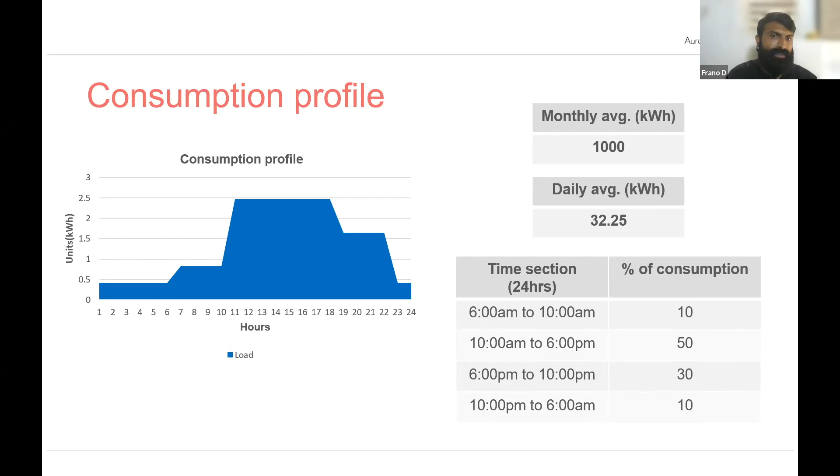As you can see, at 6 o'clock in the morning there may be a slow start. It might be the beginning of the first shift, peaking between 10 and 6 p.m., signifying maximum production at that time. Then the consumption gets lowered during the night hours, with a drop to the base load of the industrial sector in the early morning hours. So taking this as an approximate representation of the industrial consumer, we then try to recreate this in the Solsavi web tool that we have developed.

And how do we try to do that? As you can see in the graph, on the x-axis we have the hours in the day, while on the y-axis we have the units consumed in kilowatt hours per hour. We take these 24 hours and divide them into 4 time sections as represented in the table on the slide, and we allocate a certain percentage of electricity consumption to those time sections to create this consumption profile in the Solsavi web tool.

Now that we have realized that this is the way that we could recreate our electricity consumption profile using the web tool, we would also like to know how this consumption profile would change when a solar system has been introduced in the location.

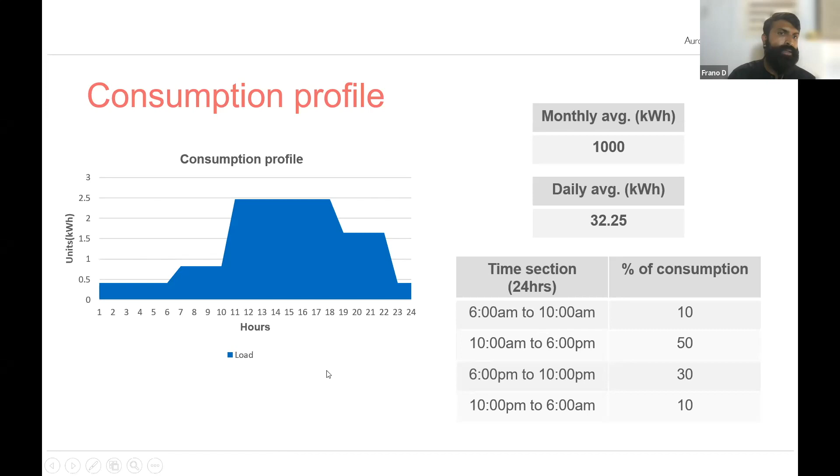So we would imagine that a certain portion of the load is taken by the solar system that has been installed. And moving further, we could see a representation in this graph where we have installed a solar system that contributes to 30% of the load or 30% of the consumption in the day, and the grid provides 70% of

the consumption. As indicated in the graph, the blue portion is the electricity that has been supplied by the grid, while the green portion would be indicative of the energy that has been supplied by the solar system installed to satisfy your load or your consumption requirement at that particular time during solar hours.

And if you notice the orange hashed portion, this indicates the amount of export that is possible with your consumption profile for the installed solar system at your location. Please also note that the red line that forms a curve starting at around 7 a.m. and ending at around 5 p.m.

in the evening indicates the maximum solar generation from the installed solar capacity in the location, and the area under that curve falls under solar hours and could represent the maximum solar generation from the installed capacity during those hours.

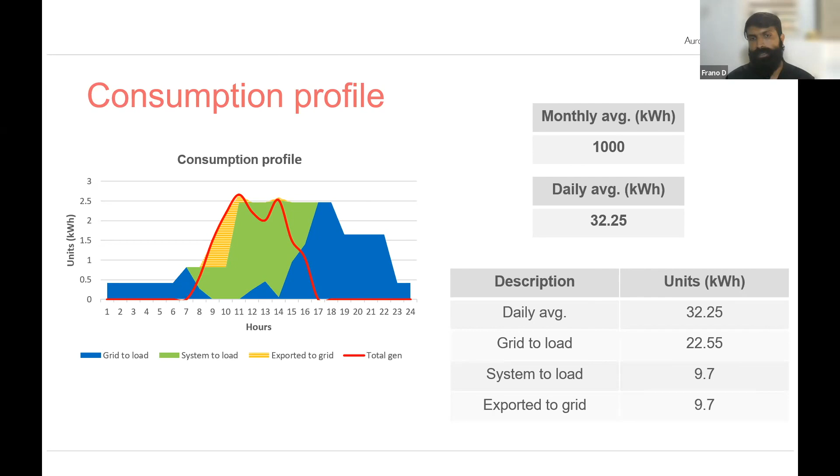installations. Moving further to how we account for this energy, we will launch a poll to understand better how we take into consideration the definitions of feed-in mechanisms. So the question is, does the net in net feed-in stand for net unit, that is the kilowatt hour consumption, or the net amount, that is the rupees payable at the end of the billing cycle? Please indicate which option you think is relevant to the net feed-in mechanism applicable in Tamil Nadu.

We will wait a couple more seconds for participants to provide their answers, and we request all participants to participate in the poll as we would get an indication of how the participants understand the metering mechanisms. I will end the poll now since most participants have answered, and share the results.

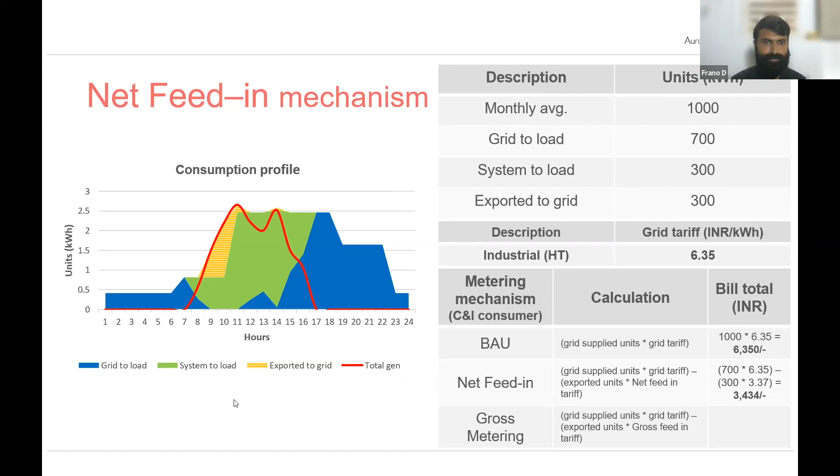So let's continue and see how the gross metering mechanism fares in this energy accounting after the installation of a solar system. As you can see, we have taken the industrial grid tariff and have the same system, but there is no contribution from the solar system to satisfy your electricity consumption in gross metering, because all the energy generated by the solar system is exported directly to the grid, and you are paid for those exported units at the gross feed-in tariff applicable for your category under the voltage type for the consumer.

As you can see in the gross metering calculation, the total grid supplied units, that is the 1000 units required, are multiplied by the grid tariff. Further, the total solar generation from your installed system is multiplied with the gross feed-in tariff for that consumer, and the difference is payable at the end of the billing cycle.

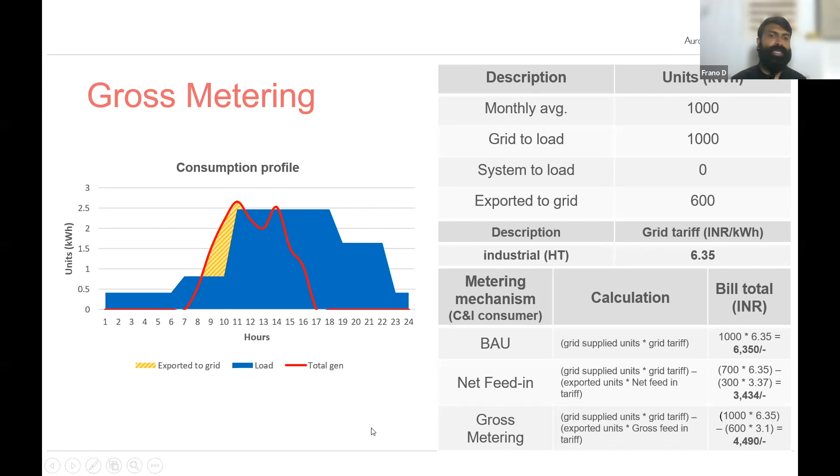Initially, while talking about the regulations and the policies, Radhika also mentioned an introduction of network charges. We will briefly talk about what network charges are and how they impact our energy accounting in the next couple of slides. Briefly, network charges are grid support charges paid by the user to the distribution licensee for connection to the grid. Network charges include the total generation of solar energy, that is the self-consumption part as well as the part exported to the grid. Network charges are applicable only for the net metering and net feed-in mechanisms.

As seen from the table, for C&I consumers under different voltage types, we have the network charges for varying metering mechanisms such as net feed-in and gross metering. There is no network charge applicable for the gross metering mechanism. And you can see the different network charges applicable for the LT consumer as well as the HT consumer under the commercial and industrial consumer tariff.

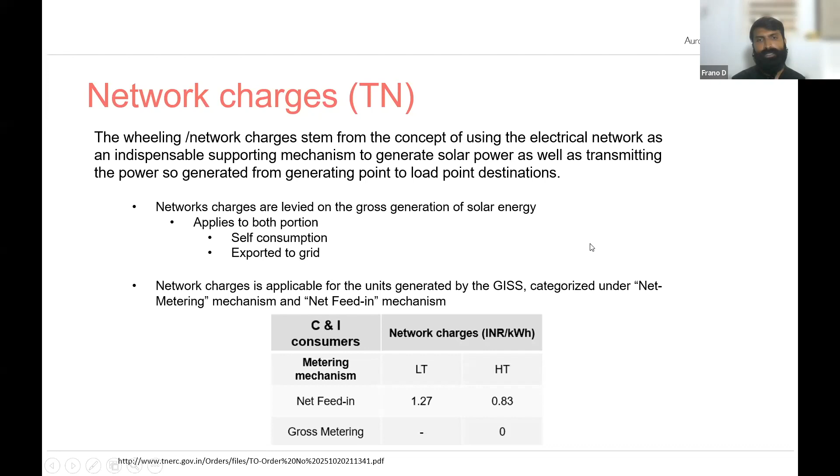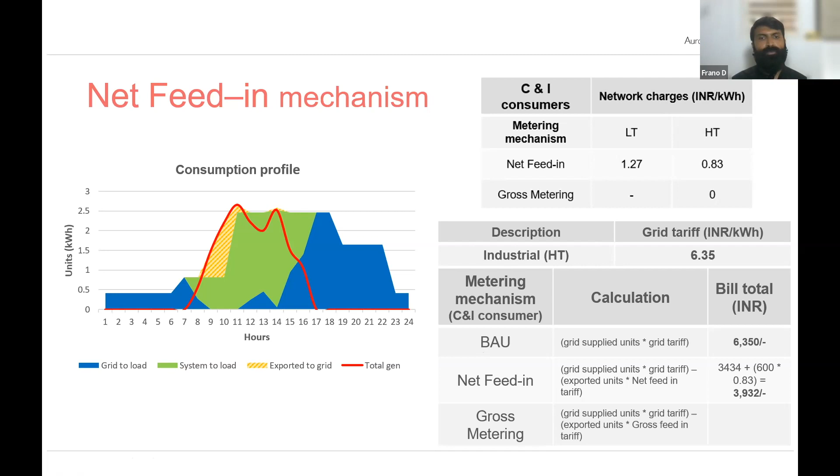So taking network charges into consideration, we apply this to the energy accounting after installation of the solar system and do our calculation for net feed-in and gross metering again. If you notice, we have taken the total solar generation and multiplied it with the applicable network charge for that particular consumer, and we have calculated the new bill to be paid at the end of the billing cycle by this consumer. Similarly, for the gross metering mechanism, we don't have any network charge, hence 0 rupees per unit has been applied, and the bill amount remains the same in the case of gross metering.

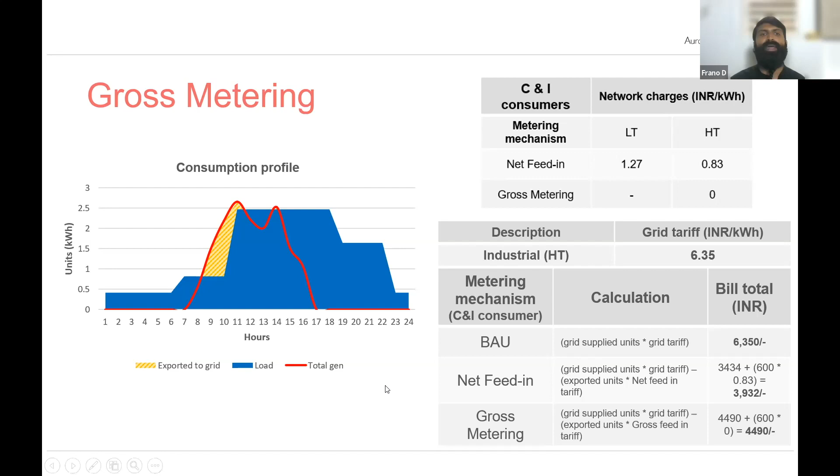Once we have realized the energy accounting and how to account for our consumption of electricity after the installation of a solar system, we move to see how we have tried to optimize the results in the Solsavi web tool. For optimization criteria, we were looking to maximize our avoided cost, maximize the savings that are possible from the installed solar system, and also to minimize the payback for the solar system installed.

Some of the important parameters for us to consider to optimize the solution was to check the self-consumption from this installed system, how much we could export to the grid, and also be aware of how much we are importing from the grid and consuming to satisfy the electricity demand at our connection.

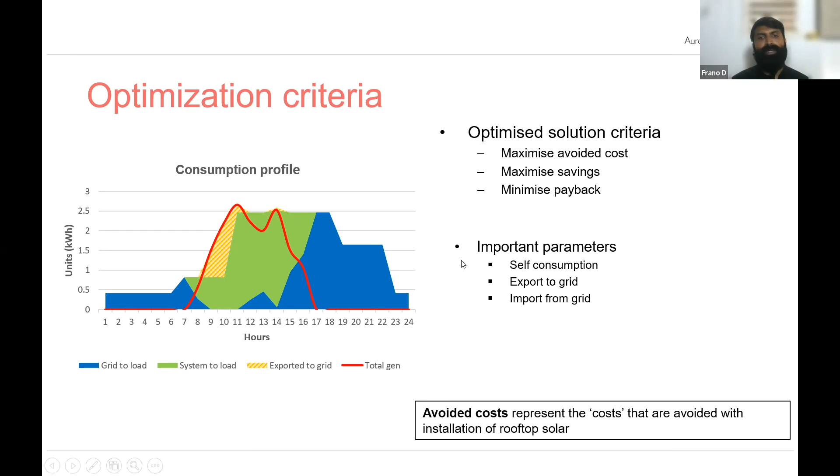However, if we take the HT industrial grid tariff, which is between 6 to 7 rupees, that is 6.35 rupees per kilowatt hour, we could fairly assume that this tariff would eventually increase year on year or over a period of time as compared to the rooftop solar system.

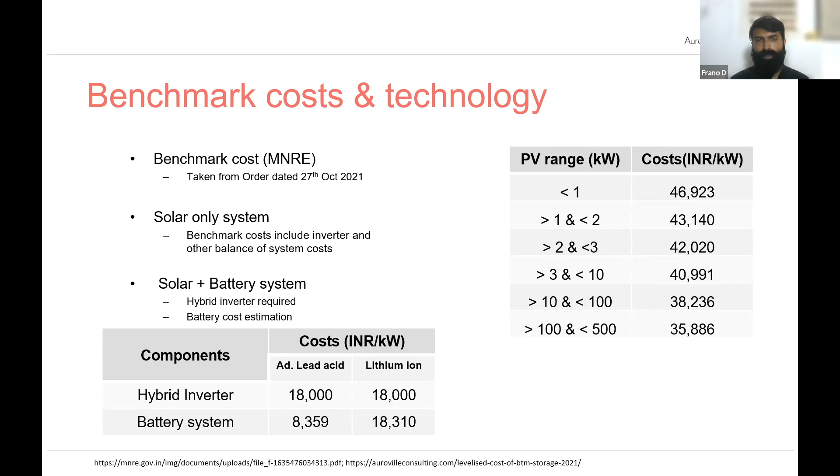So now that we have learned the various metering mechanisms that are applicable in Tamil Nadu for C&I consumers, we have also seen how installation of a solar system could take a certain portion of the load or the consumption profile of the user. And we have also realized how to do the energy accounting of your connection after the installation of rooftop solar.

Here, before moving further, we would like to pose a question to the participants on what your motivations are for installing rooftop solar. We would ask this question in the form of a poll, where we would like you to answer what your motivations are, whether they are financially based, whether they are based on some legal requirements, or whether they have environmental benefits that appeal to you for the installation of rooftop solar.

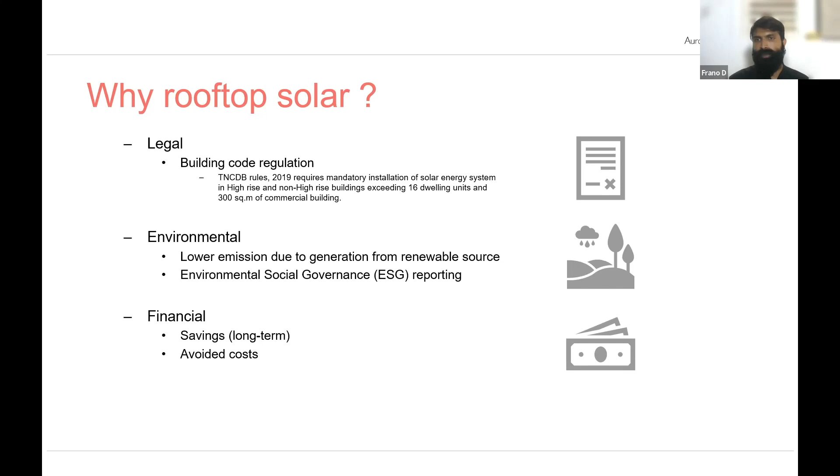Further, once we have assessed that we need the rooftop solar system, the decision-making process for this would begin with the conception of the idea or the project, to check the feasibility of the project, to do a design and planning for the implementation or installation of the system, and finally operate and maintain the system over its lifetime period.

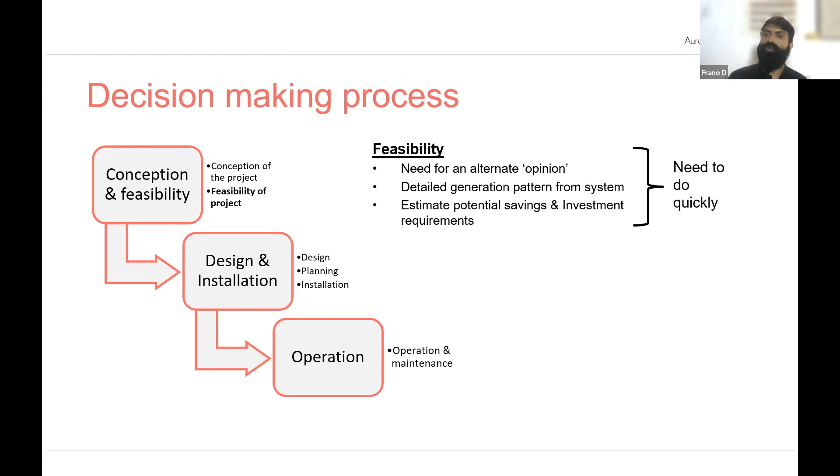During the feasibility stage, we would require a detailed generation pattern from the system to make an accurate estimation of the system size. We could also get an estimation of the potential savings and the investment required for that solar system. And we need to do this fairly quickly. So to do this quickly, we introduce the tool Solsavi.

The tool would be updated with the tariffs and the latest policy regulations, supports analysis which includes battery storage, provides a 25-year analysis and a financial analysis for the selected system, and provides outputs in terms of return on investment, payback years, and potential savings. We also have an option in the web tool to either optimize depending on the inputs provided by the user, or customize depending on the desired capacity that the user wants to install at the location.

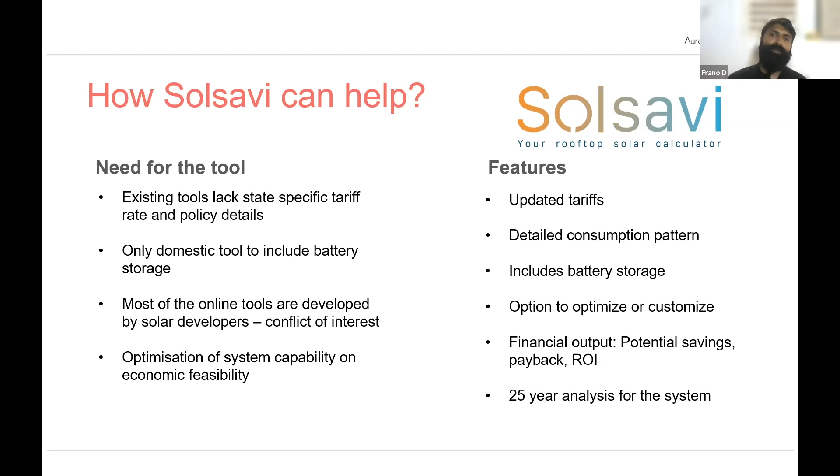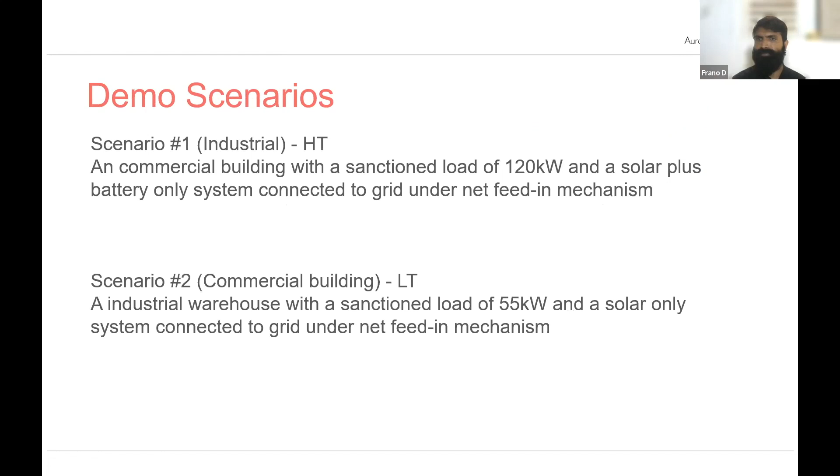To get familiar with the Solsavi web tool, we have designed two demo scenarios. The first scenario would be for a commercial building and HT category, while the second scenario would be for an industrial warehouse and LT category. The first simulation I would carry out in detail, and I would explain the process of simulating it in the Solsavi web tool and explain the results. Demo scenario 2 we could do together simultaneously with all the participants and try and achieve the results while using the tool.

So to further proceed and simulate this in Solsavi, I will stop sharing my screen now and shift to the web browser and share the web browser screen. I hope the screen is visible on your side.

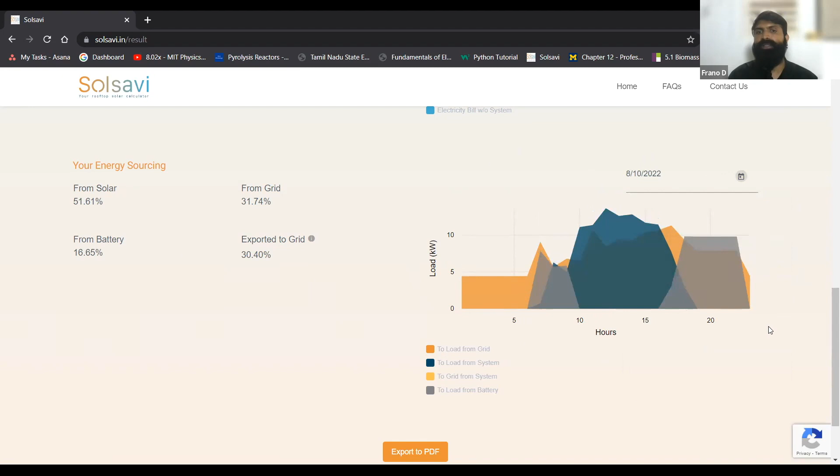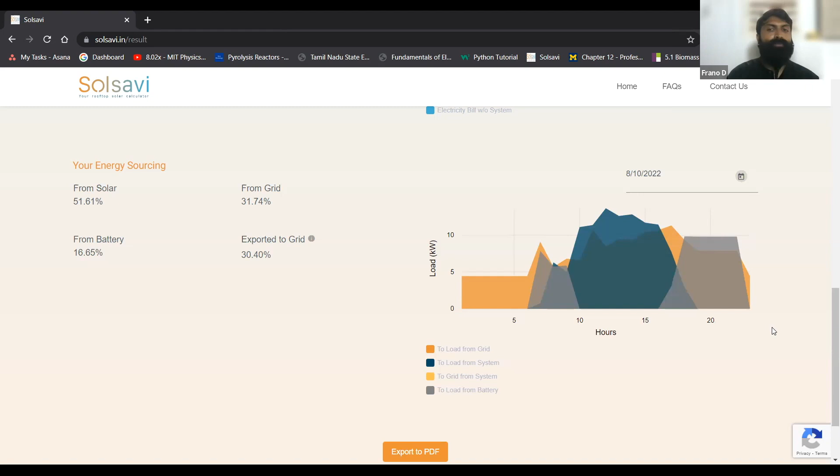You can see that this generation from solar and contribution to load has been provided for today's day, and we could select any particular day in the year and it would give us a load profile for that particular day. Hence, we could have an analysis of almost 1 year of how our solar system could behave and what changes could be estimated with the weather data.

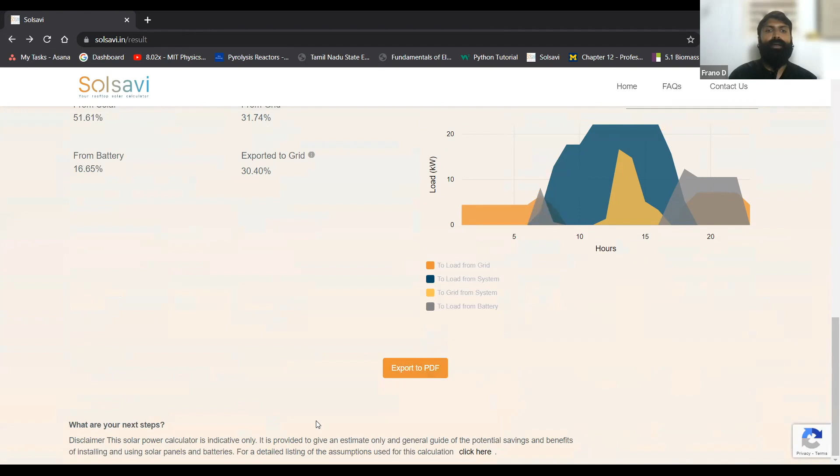We also have the provision for you to check the assumptions at the end of the page, where we share what assumptions we have taken into consideration during our simulation of these results. Finally, you could also download by clicking the export to PDF button, and the detailed report then gets saved on your computer at the location you have chosen.

To be able to simulate the second scenario, I will stop, return to the slides, show you the second scenario, and come back and try and simulate together this time, so that all of you can follow the instructions and simulate it on your own laptop or PC.

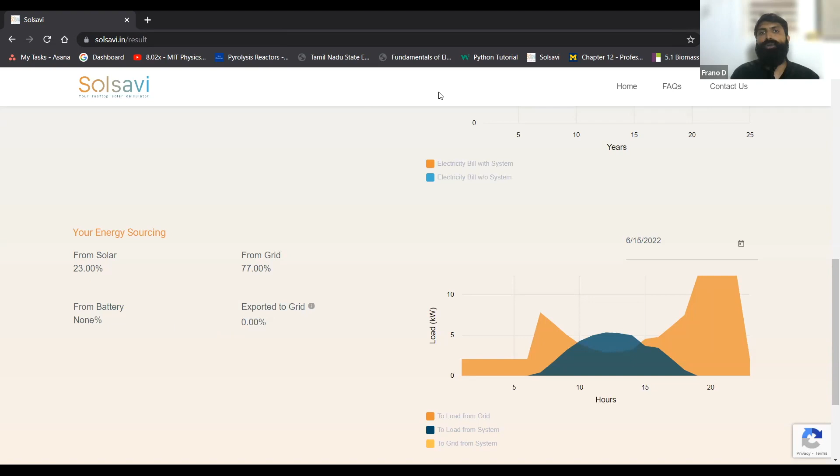We also have the energy sourcing for this particular system, where 23% of the load is satisfied by the solar system installed and 77% is from the grid. This system does not export any energy to the grid, nor uses battery, as we have selected a solar only case for our simulation. You could download the results by clicking the export to PDF button and download a 2-page result summary as well as detailed report for your further analysis.

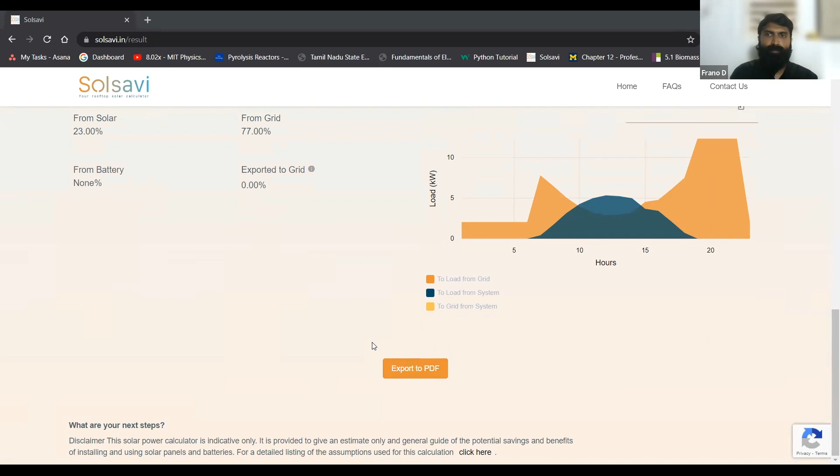To be able to further modify or change your results, you could make use of the button called revise calculation on the summary page of your results, and this would take you back to the demographic page where you could further modify and change any selection that has been made, and or come to the customized page and provide a different input to see how your system varies with a higher solar capacity, and download the results and use it

for comparison. As you could see, maybe we have a lower return on investment when a 20 kilowatt system is installed as compared to a 10 kilowatt system. And this comparison could help us determine what could be the best system that we could install for our connection and our consumption pattern.

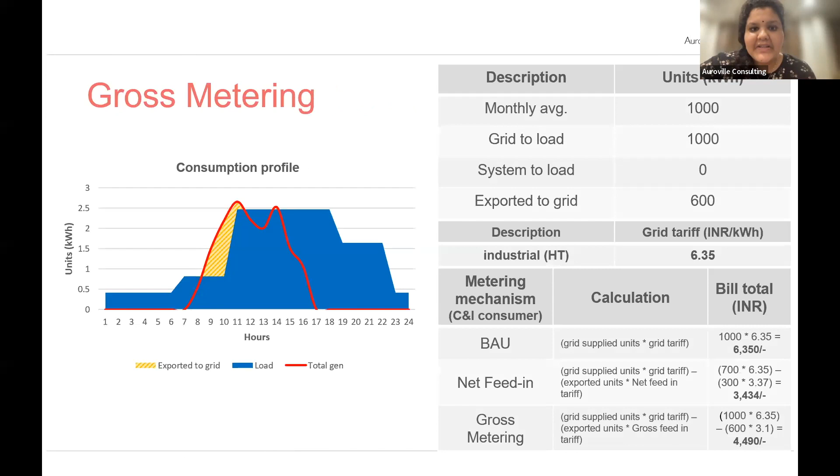While in net feed-in, we calculate the amount to be paid for the grid supplied units, and we calculate how much has to be paid for the export, and we take the difference of this amount. That would be the main difference between these two metering mechanisms. I hope that answers the question.

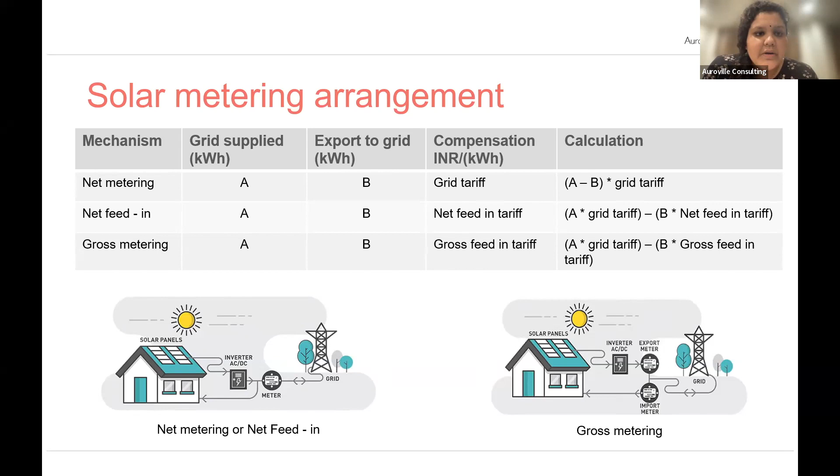We have one more question from Mr. Som Ishwarmurthy. For commercial consumers, what are the options for metering? What metering mechanisms are available for commercial consumers? Can you please go to that slide, Frano? Yes. Radhika, would you like to take this question?

Yes, I can. So I would like to tell you that net feed-in is valid for all consumers, including high tension categories. Net metering is only valid for domestic consumers. So only domestic consumers have the option of choosing between net metering and net feed-in. And gross metering is only valid for high tension consumers with system sizes larger than 150 kilowatt. So to answer your question, for commercial, only net feed-in would be valid as a metering mechanism.

Hello. Madam, I'm Sivakumar. In the existing policy, in HT connections, there is no option to export any units. In current policy, HT connections, can we export? Yes, with system size larger than 150 kilowatt, HT consumers can export. 300 kilowatts, madam. HT connection 300 kilowatts. So if any excess units in net feed systems, can we export, ma'am? Yes, you can export. I hope that answers your question.